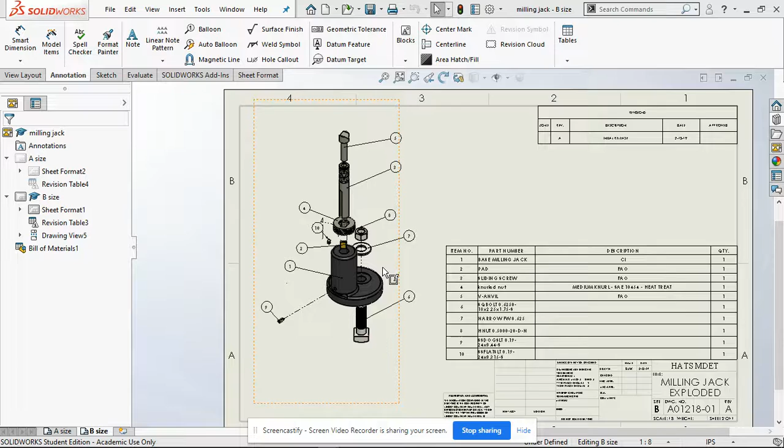On the left here, we have our actual exploded assembly view, which you make in the parts view, one of the things you can do there, along with motion studies and so forth. But we're not getting into that.

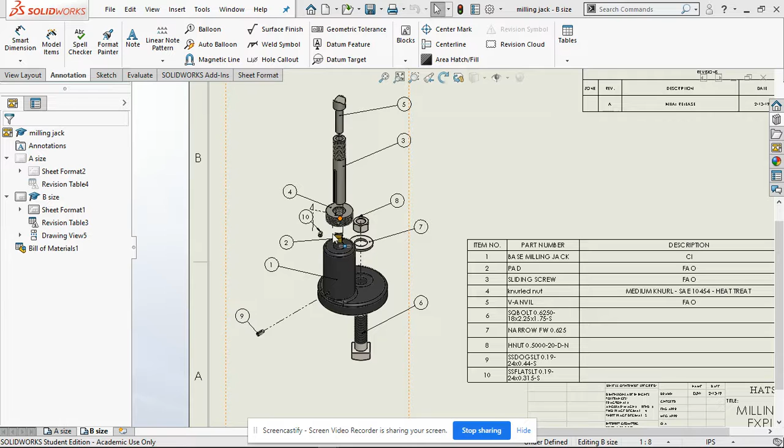To begin, we have our balloons. These balloons mark each part for your bill of materials. That way you can say, okay, item number one is the base milling jack, which is cast iron and has a quantity of one. In other words, item number one is a base milling jack, made out of cast iron, and we need one of it for this assembly.

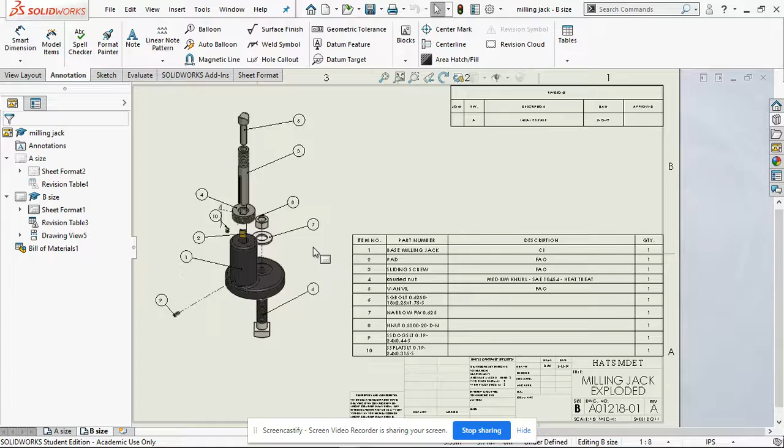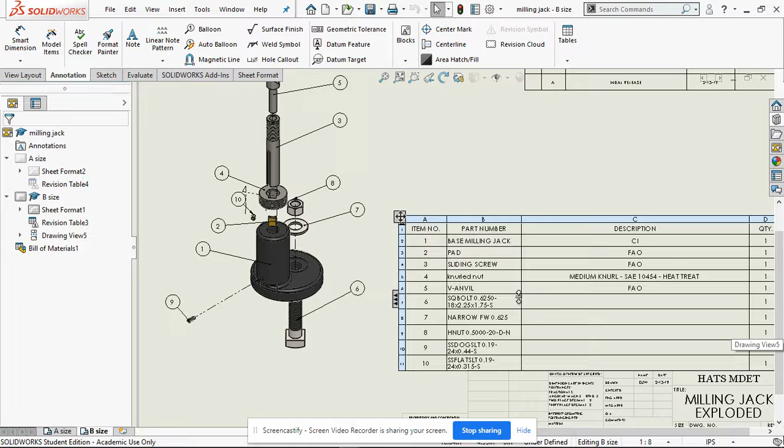Same thing with the other things like the pad, which is number two, so on and so forth. Does the description pretty much say something about the part? If not, like for the square bolt, the washer, the nut, and the two set screws, you would put in either a company, an item number, or a part number that you would order or buy to make this assembly.

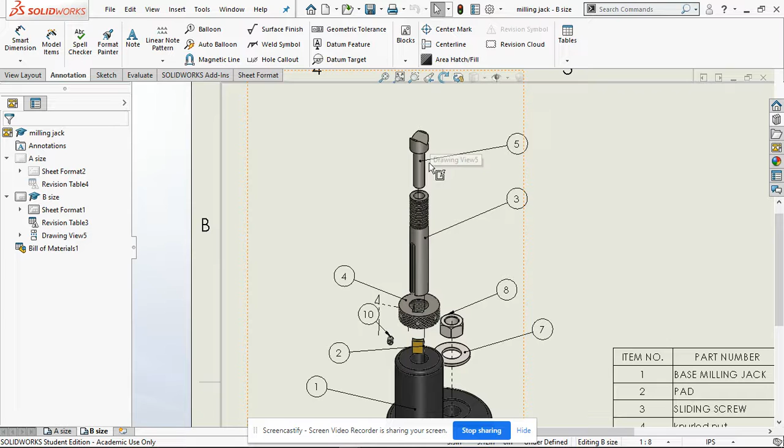Moving on from that, we have these little dotted lines going everywhere. These are called exploded lines, and they tell you which part goes into which and how it all assembles together. In all honesty, it can get kind of confusing. I did this a while ago, so it's not in the best of shape, but it still does the trick.

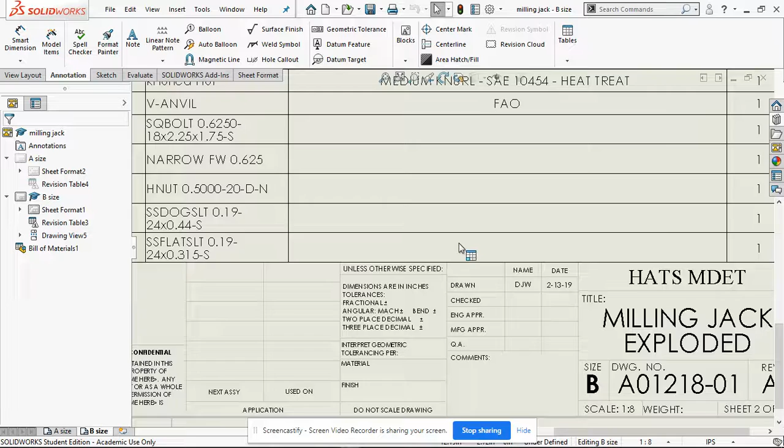Moving on from that, the name is literally just Milling Jack Exploded. As you can see, I made this February 13th of 2019, so it was more than a year ago. The revision table is just revision A, the initial release, because there haven't been any changes made to this.

Bill of materials, really easy to insert. You just go to Insert, Tables, Bill of Materials, right there. Just click that, it'll give you a little window. Open this up, and you can insert it.

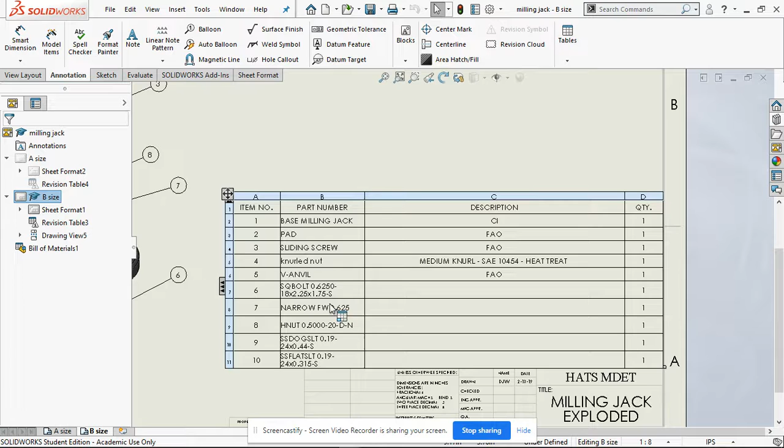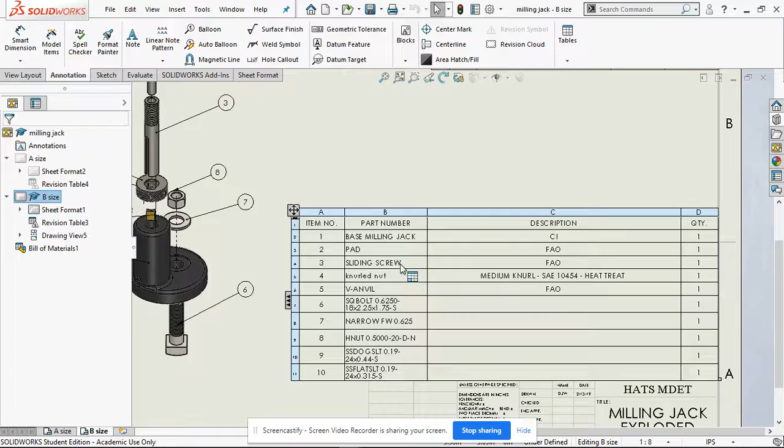For the part number, sometimes it fills it out for you automatically, which is why base milling jack, pad, sliding screw is already filled in, and sometimes it doesn't. So sometimes, like knurled nut, I had to put in myself. The description you have to put in yourself as well as the quantity. But other than that, the bill of materials is really easy to insert, really easy to set up. This is, in all honesty, one of the easier things to do in drawings.

That's really it. I will go into one other thing, and that's when you're in the drawing, you have to save the alternate view as an exploded view. Otherwise, when you try to insert your model, it will not work.

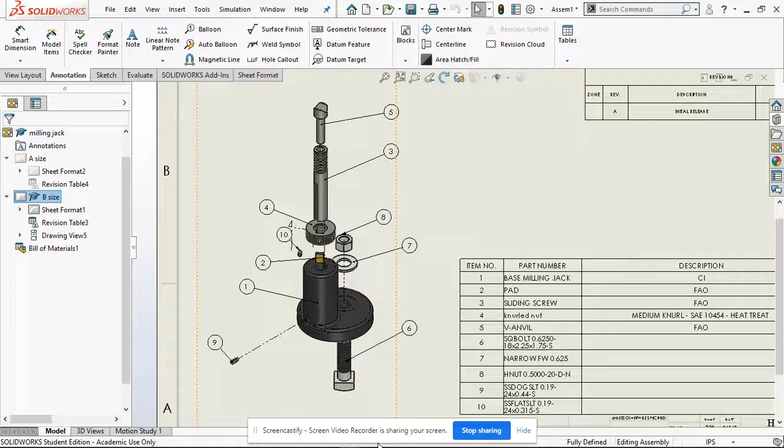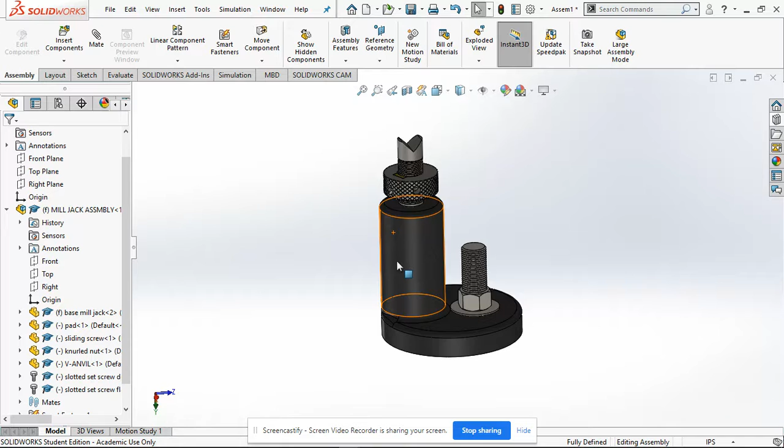To show you that, we're just going to go over here and show you assembly one as is. So it started off as this, just a standard milling jack. You can see our little set screws, our knurled nut, our pad, and I apologize, this part is upside down. You can make it so in your drawing you do a special view to make it right side up. But other than that, we have again the milling jack assembly with smart fasteners, stuff like that.

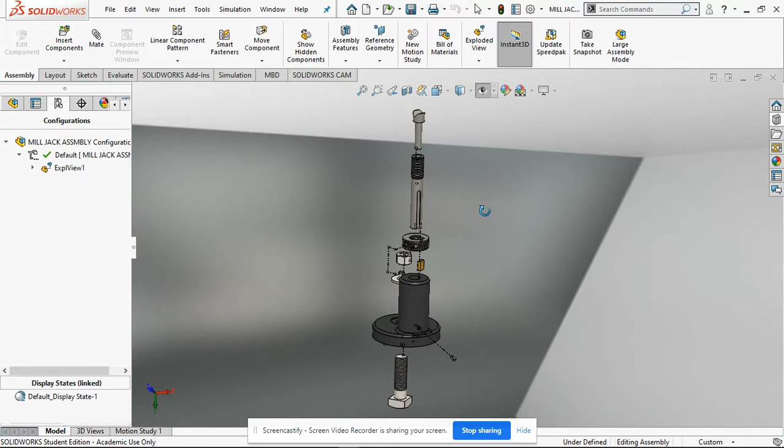Let me see if I can get, here we go, exploded for you. So this is pretty much what's on the drawing. And as you can see, all those lines are there, and those are exploded lines. It just tells you that this part goes into that hole, this part...